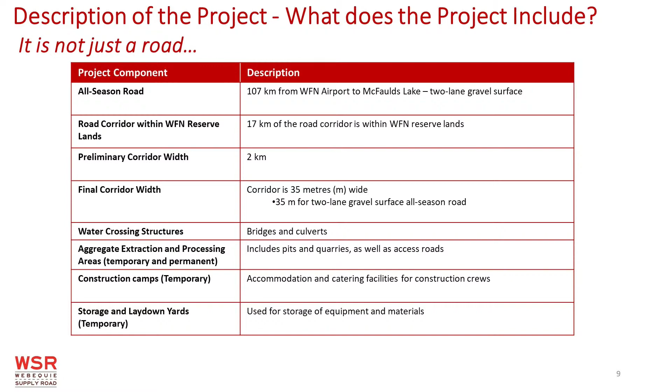So hopefully that gives people an idea of exactly what the project involves, and the environmental assessment covers all of these components—they're all part of what we call the project.

So speaking of projects, Mike, like most big projects, it occurs in phases, and each phase involves different activities. Maybe you can take us through the two main phases and some of the activities within each of those phases.

Yeah, so I think it's important right now—we're at the pre-construction phase, doing a lot of planning and studying called the environmental assessment, and we'll walk through some of that in a few moments. But after pre-construction is actually construction. So if this environmental assessment's approved by everybody, including Webequie, then they'll embark on the construction phase, which includes a whole variety of activities. And then later it would be the operation and maintenance phase.

So you can see on the screen the range of activities within the construction phase: field surveys, staking and layout areas, the clearing that they have to do based on the engineering design and the actual routing selected for the road. Once the field surveys were done, you start clearing it out, and the grubbing of trees and other vegetation, and then the construction of the storage and laydown areas.

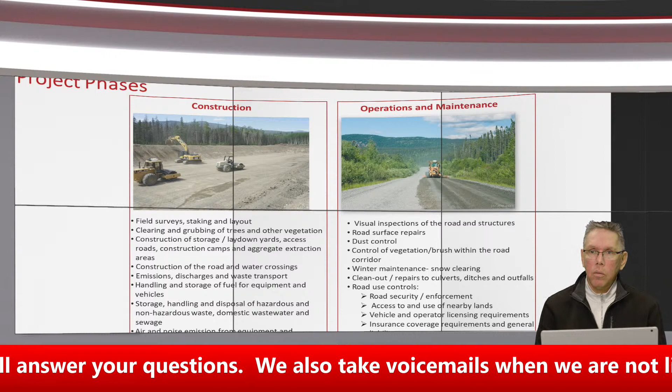So you'll see additional footprints during construction, such as access roads. You might see a construction camp for the workforce along the routes. You see that, I think, now with the transmission line being built with Watay Power—they have different camps, and they're mobile, once certain sections are built, they move further north.

There are also aggregate extraction areas, another site where aggregates are being extracted for use on the road and the construction, as well as waste transport—things that aren't being used or have to be moved from the site are transported out.

Then there's the handling and storage of fuel for the equipment and vehicles. You'll see heavy equipment used along with other vehicles during the construction phase.

There's also storage, handling, and disposal of hazardous and non-hazardous waste, both domestic wastewater and sewage. Part of the camp and other areas need water, say for dust control or similar purposes, which will be part of the construction.

Sometimes there are air and noise emissions from equipment and vehicles, so you'll see sound barriers, mostly in residential areas or closer to cities, set up around the construction site to reduce noise levels affecting humans or other animals. There's also erosion of exposed soils that has to be managed during construction.

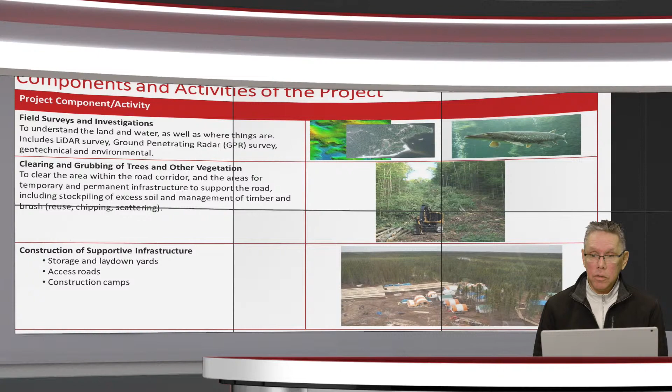If you go back to slide 10, you'll see the operation and maintenance list. Once it's built, just like on the main highways we all drive on, even on the winter road, someone has to maintain the road.

You'll see graders—there's a picture of a grader here—flattening or maintaining the road. Same thing applies with this possible Webequie Supply Road project: there are visual inspections of the road and structures, and road surface repairs, so if there are bumpy areas they'll get repaired.

Dust control, and control of vegetation and brush within the road corridor—sometimes in the summer you'll see people clearing the right of way because it's getting too bushy.

Winter maintenance and snow clearing—in the wintertime you'll see efforts to keep the roads in better condition when it comes to snow or ice conditions.

There's also the clean-out and repair of culverts, ditches, and outfalls, so in areas that have those, you'll see people doing that work as well.

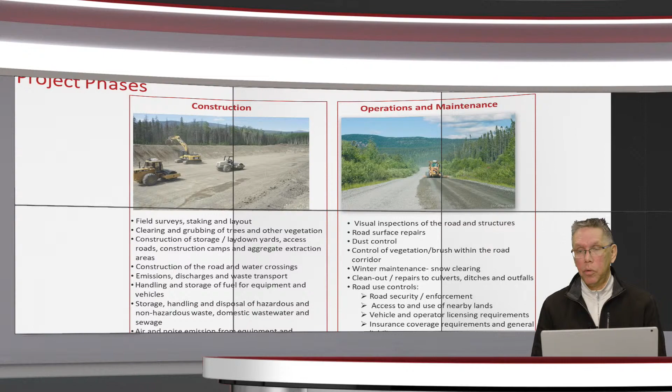Then there's road use controls or management, like road security, enforcement of rules, access to and use of nearby lands along the route, and vehicle and operator licensing requirements.

If it's going to be a public road or community use road, there have to be rules around that, and with the use of a road come insurance coverage requirements and general liability.

This is all part of the planning around construction, operation, and maintenance that has implications for people thinking about using the road. You need to think through what you'd need if you're a remote community wanting to use this road without a license or registered vehicle, or consider the insurance requirements for a publicly or community used road, and whatever other rules may apply.

So that's the different phases and the different activities within those phases.

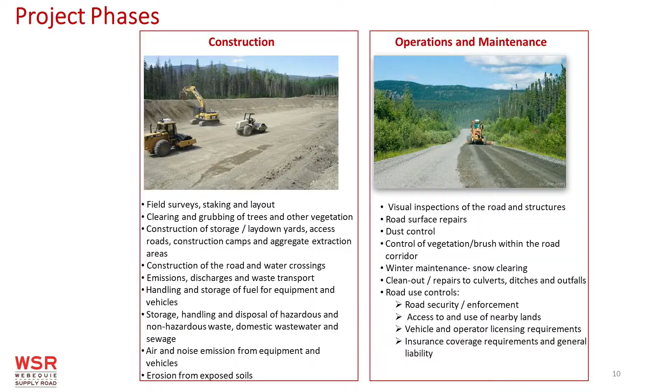Don: Thanks for that, Mike. And boy, it sure looks like time is not our friend on this, is it? Yes—well, let's do a quick dive into the project components and activities before we wrap up.

If the team can switch to slide 11 for me, please. We'll bring that up on the screen, and I'll run through that and then hand it over to Mike. Okay, so let's talk about some of the activities that have gone on so far or will be going on.

One thing we did very early in the project, before the EA even started, was conduct what's called a LiDAR survey. That involves using a fixed-wing aircraft—a small airplane—with sensors on board, hanging off the wings, that send laser signals down.

Depending on how long it takes for the signals to come back, that helps identify the height of the land, allowing us to get a very detailed, high-resolution picture of the land's elevation throughout the study area in an efficient, fast way.

We can then use that information to understand things like drainage patterns—how water drains over the land—which helps us design the road.

It helps us in a lot of different ways for road design, in terms of identifying areas where the road might be steep, and maybe you can avoid those areas so the road isn't as steep and unsafe. So you gather a lot of information from that.

Another survey we conducted earlier in this project was a ground penetrating radar system, which we used to help identify the thickness of the peat layer through the muskeg areas, the James Bay lowland areas that the project runs through, because the thicker it is, the harder it is to build the road through those areas. So those were a couple of the field surveys done earlier.

If the EA is approved, one of the early activities would be to clear and grub trees and vegetation to clear the area to start the work. Then, as Mike talked about, the construction of some of the supportive infrastructure, like storage and laydown yards, access roads, and construction camps.

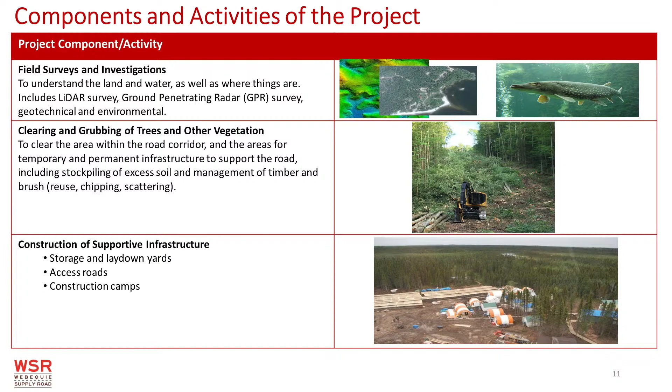I'll pass the baton over to Mike to talk about some of the other components and activities. For those who've seen road construction in Northern Ontario, you'll see a lot of foundations along the roads. In some cases you'll see rubber tires, shredded tires, used as foundations. But in a lot of cases you'll also see rocks and aggregates.

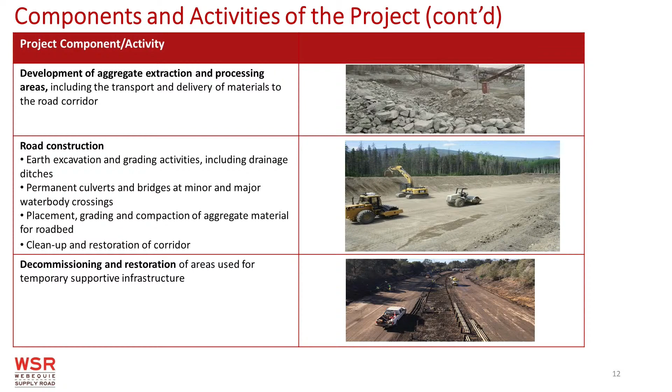So there are many uses for aggregates. Sometimes it's used for the foundations of the road, as well as for maintenance. So part of the studies we're doing is trying to identify where aggregate sources are for road uses and foundations, but also for maintenance and operation of the road.

Along the road, aggregate sources are being identified, and some geotechnical work will be done to see what type of rock or aggregate sources are there in terms of the grade, and how far along the road that source is from the road, because at that aggregate source there will be a need for access roads, smaller roads to access those aggregates, either temporarily or permanently, which ends up being part of the overall project.

So aggregates are a big deal for roads of any type. It's going to be a discussion point in the future with the project team and with communities, because they too look for aggregates. If you look at the remote airports operating in Northern Ontario, the MTO are always looking for aggregate sources to maintain their own airstrips.

For road construction, there's earth excavation and grading activities that have to occur, including drainage ditches, permanent culverts, and bridges at minor and major water crossings. Once those crossings are identified and studied, and the geotechnical work is done on the banks, we see what kind of structure is going to be placed there.

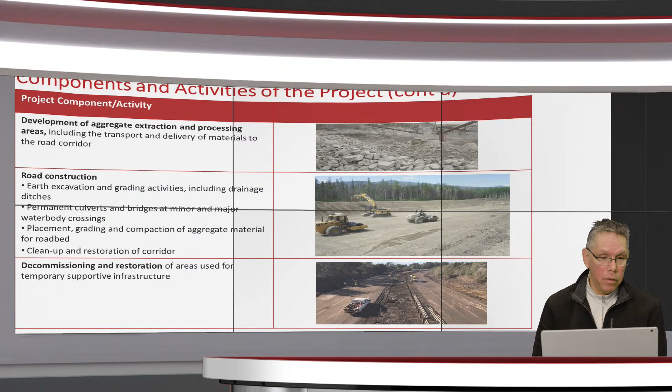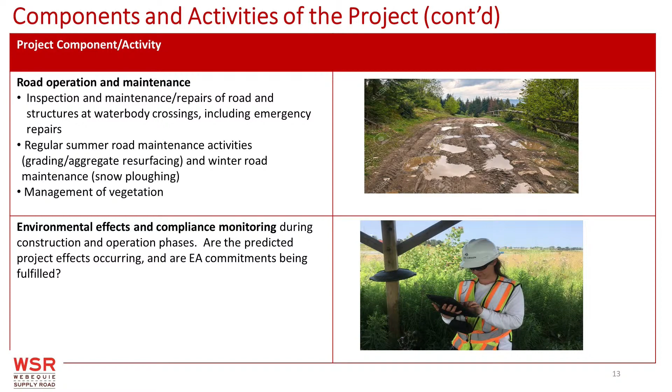Moving to the next part, there's road operation and maintenance. Of course, roads that are used a lot have to be maintained. Sometimes emergency repairs are needed due to floods or washouts, and there's management of vegetation along the roads, as well as environmental effects and compliance monitoring afterward. Once the environmental assessment is completed and construction is completed, it doesn't just stop there - there are actual commitments made for the operations phase.

So I think that takes us to the end of our program, Don. Yeah, that was a lot of material to cover in a short time, wasn't it, Mike? Yeah, a lot faster than I thought.